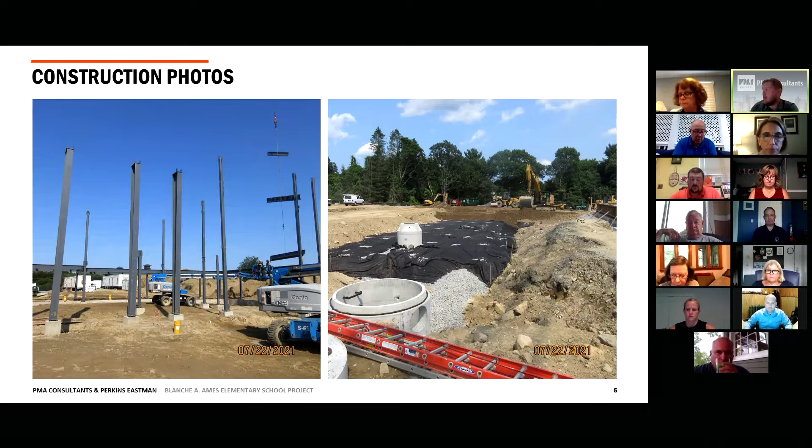In July, since our last meeting, we've had continuation of structural steel. This is a picture of a building - I believe we are standing in the gymnasium, looking back at the trailers on the left. On the right, you see what was the excavation of the old leaching chambers, which is becoming underground infiltration system 3. This is where all of the water from the roof of the building gets transferred and dispersed into one of these three units. The other two have already been completed.

On the left, you'll see excavation and stone backfill for the retaining wall along the eastern side of the site, against the old paper road. On the right, you'll see what was the beginning of the structures installation at the old parking lot - part of phase 1A that we'll talk about today for the parking lot that's going in. So those drainage structures and water distribution systems were being installed.

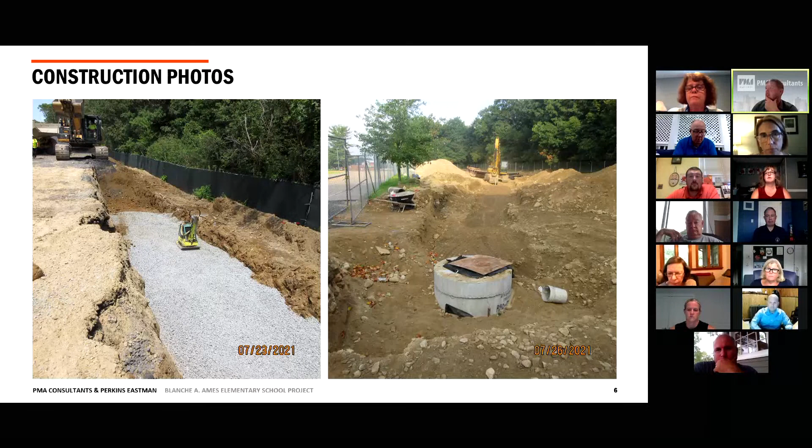On the left, you'll see a photo of the first slab on deck pour, which was on 7/29, for E building. It went great - FFFL, which is floor flatness floor level, was taken that day and it passed, no issues with that first pour. On the right, you'll see continued installation of building foundation and building walls. This is a picture of the rebar getting tied, getting ready for concrete to be installed at the other end.

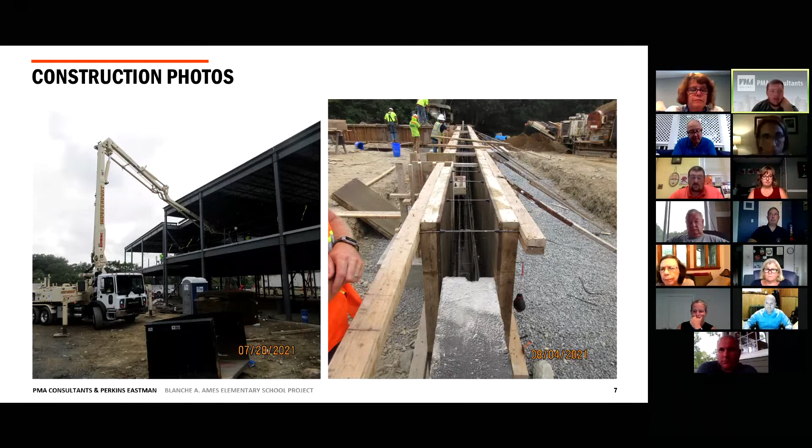On the left, you'll see a photo of the new location for the transformer, which will take the service from the street and then into the building. Additionally, it will also house the generator for the school. On the right, you'll see a picture of the mock-up foundation and mock-up wall, which have progressed today - they have the actual building mock-up framing on them.

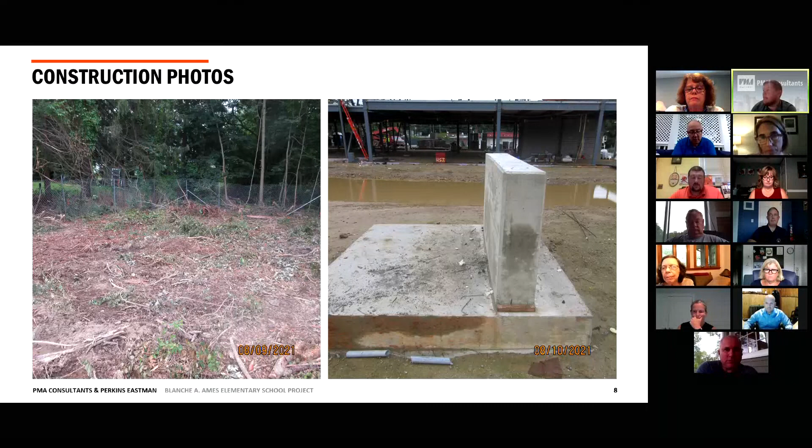We've also continued progress on the underground sanitary lines throughout the building. This is a picture of B building excavation sanitary. The pipe has been installed, it hasn't been backfilled yet, but it runs throughout the building.

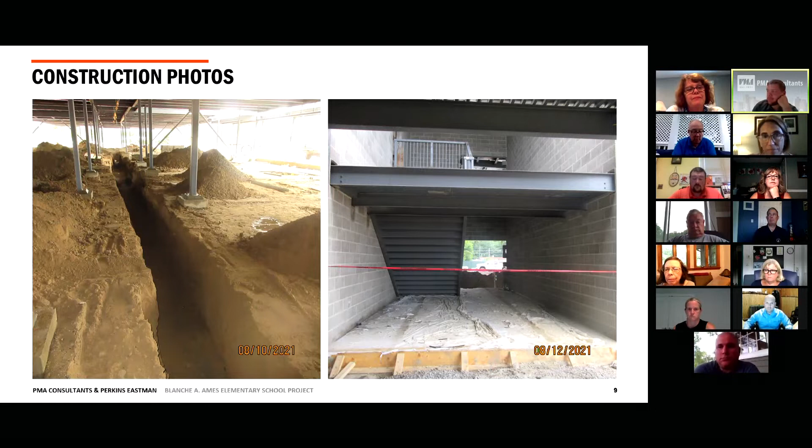On the picture on the right, you'll see stair 4. The concrete has not been poured yet on any of these stairs, so they're not in use at this time, but we do expect those to be poured very shortly. So we likely won't need temporary stairs, we'll be able to use the actual stairs instead of the ladders.

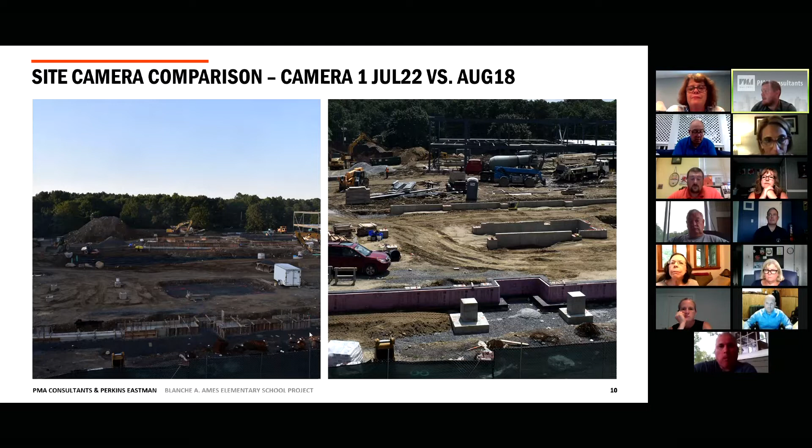Looking at the progress on camera 1, on the left you can see we had no steel, very little foundations, and foundations were ongoing in building D. On the right, you'll see the steel up and foundations nearly complete in building C.

On the left, you'll see building B and some of building A going up. On the right, you will see building B and most of building D erected, and the slabs are getting prepped with the metal deck.

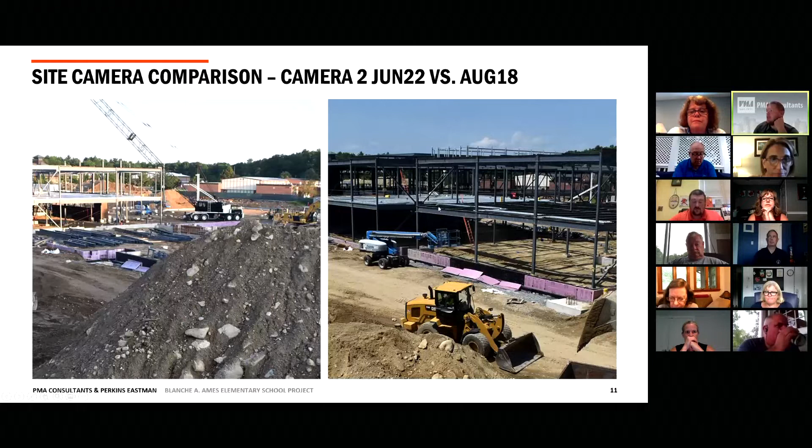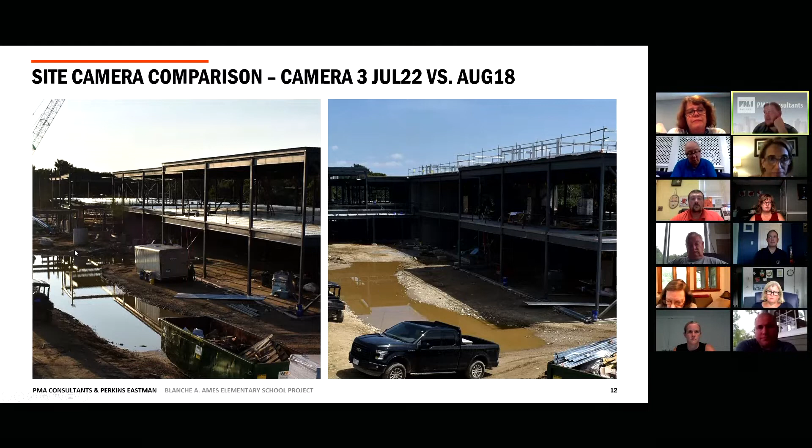I believe that was all of the construction progress photos. So if anyone has any questions, I can't see everyone, but feel free to yell.

So the next item we have is the topping off ceremony. Just a quick background on the celebration, or beam topping off ceremony, what it is and why we do it. It's a pretty big piece of the construction. It's the last beam that's hoisted into place from the crane.

And it's typically, you can see here, I believe it's a Nordic tradition to put the tree symbolizing the building coming out of the earth. And we typically have the flag on the beam that gets lifted up as well.

Right now the plan is August 26th at 1 p.m. It'll be the same for anyone who's going to be visiting the site. Same location as the groundbreaking, that back area right outside the fence. So we won't need hard hats.

At this time, large vinyl stickers were brought over to central office and are in the process of being signed. I'm not sure if someone from central office can advise where they are for signing, but they are available. What we'll do is bring them over on that day and place them right on the beam prior to it being hoisted up.

MSBA will be there, district will be there, PMA, Perkins Eastman, and Brait Builders will be there, and our steel workers, Stellar Steel, and directors will be there as well. So happy to take any questions on the topping off ceremony.

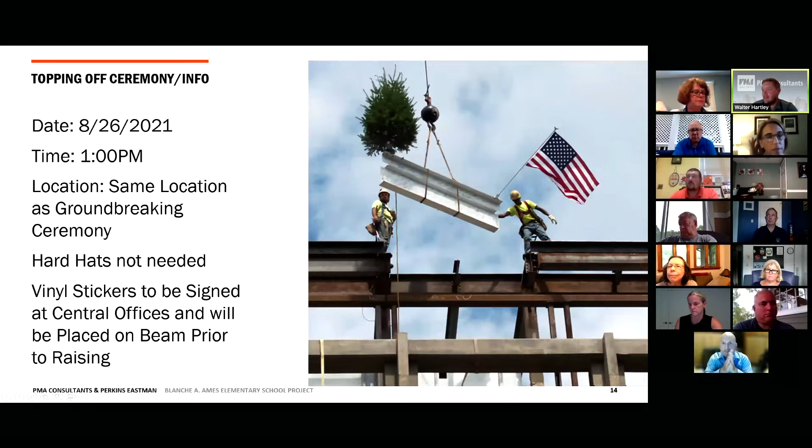Next item, Parkview School reopening. Just to remind everyone of the phase 1A work that's been ongoing and scheduled to be complete - this is the parking lot area you can see highlighted, and the paper road on the right-hand side.

The work in the parking area underground is complete. They are currently placing soil and dense grade in preparation to have the grading machine, the grader, on site Saturday. Brait Builders will be prepping that parking lot area, then the top part of the screen, the curved area, on Saturday.

They are planning to pave on Monday, the 23rd. That is pending weather. If we get some bad rain, bad storms, and it does get pushed off, the pavement day could get pushed a day to the 24th for that top area.

On the right-hand side, you'll see what we call the utility corridor. There's gas, water, underground electric, tel data cable, all coming in from the street and then from two poles that are going to be relocated.

For the two poles being relocated, we are awaiting documentation from the utility companies that's going to go over to the Board of Selectmen. We were trying to get on their agenda for Tuesday, but unfortunately the documentation isn't accurate, isn't up to date, and is being revised. They're working through that right now.

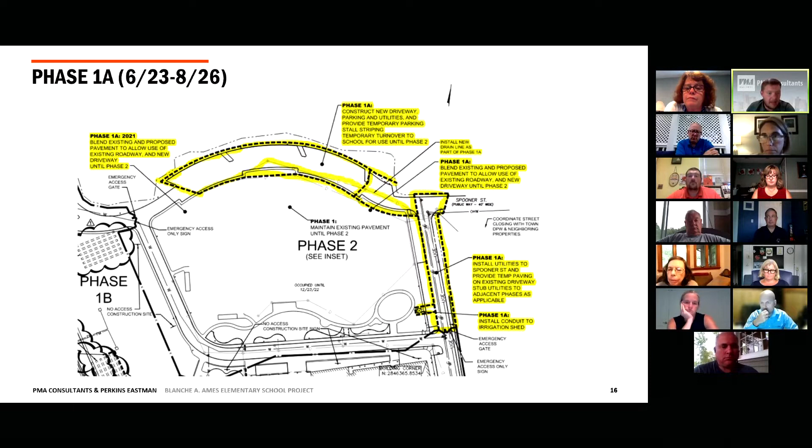So we're working with everyone to try to coordinate that. I think I have another picture to show, and I'm more than happy to take any questions or talk about anything in regards to this.

If you can see the curved area at the top of the street, that's the new parking area being prepped right now. Spooner Street runs straight through without the curve, and this parking area connects back on both the east and west sides. So I'll take any questions or discussion on all of this.

I think you're good, Walter. Obviously it seems that you are doing what you need to do in terms of coordinating with Sam and the school, and I think that's very critical. If there's any point where you also need to reach back out to abutters, I'm confident you'll do that as necessary as well.

Absolutely. Those are always my concerns right now as this work is going on — making sure we're connected with the abutters to the extent that we can and need to be, and also minimizing the impacts to Sam as he tries to run a school this year.

Absolutely, we're going to be in contact. We've talked to Sam a bit, but I think we'll be in contact with him almost on a daily basis, if not every four-hour basis during the school year. It's going to be busy and tight, and I'm sure we'll get some of his deliveries and he'll get some of ours, and we'll coordinate them and get that all straightened out.

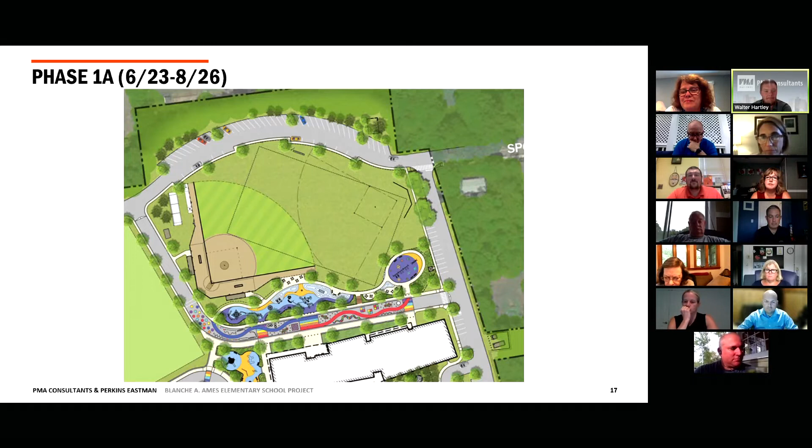All right, quick cash flow and schedule update. Billed to date is 16.3 million. That is through the month of July.

We are expecting our next requisition from Brait Builders shortly, in the next week or so.

MSBA reimbursement to date is 3.9 million, and pending MSBA audit is 9.2 million. We're expecting them to review that 9.2 million and provide reimbursement very shortly. That request went in, I believe, about 2 to 3 weeks ago, and they're usually about 3 to 4 weeks behind the request. So we're in good shape there.

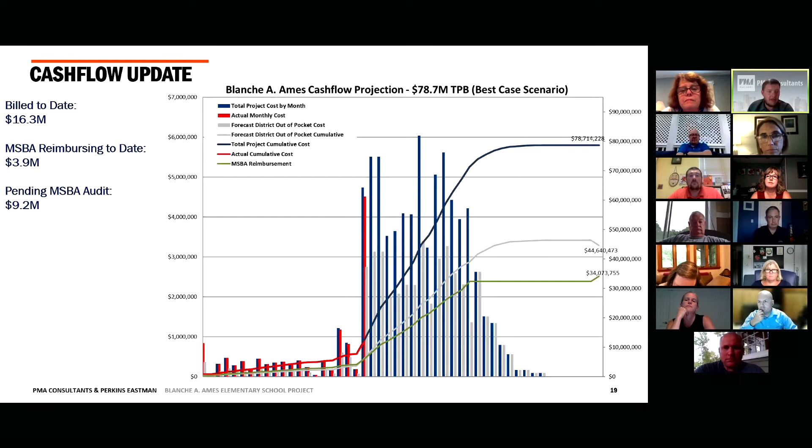Construction look ahead: we'll be completing structural steel in building C and D, completing the phase 1A work, with the caveats we talked about earlier, the 2 stub-outs for tel data and power, and the permanent power. We're going to continue with placements of slab on deck, and probably start slab on grade very shortly once the underground is complete in building E.

We're going to continue with the installation of underground utilities throughout the building. Masonry walls have been going up, and I would expect those could be complete within the next month or two.

Installation of roofing is ongoing. We are in a temporary roof situation as the insulation is not coming until later in the year, but that's not a big deal. It's getting temped in by our roofing subcontractor, and they're doing a great job so far.

We're going to continue with site drainage and getting into retaining walls around the site. We're going to continue with layout of interior and exterior walls, and very likely begin framing of the interior and exterior walls very shortly.

I think we're expecting a delivery next week by our drywall guy. That would be metal studs, not drywall.

MEP coordination is probably going to wrap up in the next month or two. That's really just coordination between all the trades: fire protection, electrical, HVAC, plumbing, everything in the ceiling and underground, from the ceiling all the way down to the underground.

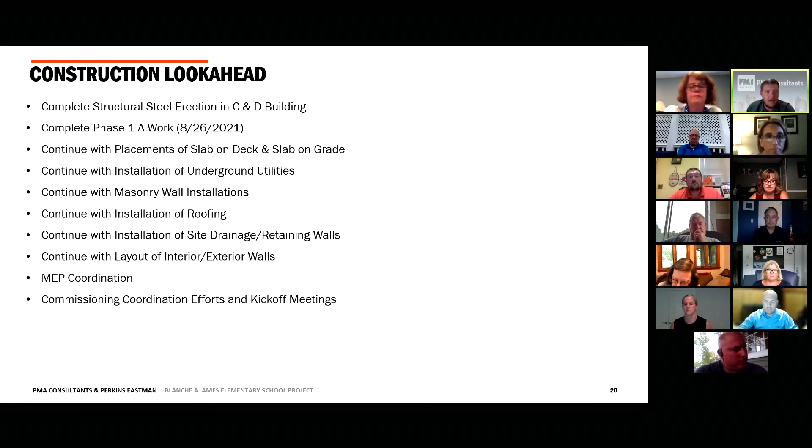We do have one vote, and I'm going to let Dan or Dawn talk about this one. It's a discretionary change that may not be considered discretionary. We're right on the border of needing to do it, and it's changing a custodial storage room to a bathroom. I'll let Dan talk about it.

If anyone can't see this, I can zoom in a bit. Oh, you have drawings, good job. I do, I have the drawing up for you. No, we had everyone's drawings too, and I wanted drawings, but I might want Dawn's drawings because they show the whole building. And of course, timing is everything, because my kids just ran out here with 2 iPads. No, we can't do iPads because of this internet. No, goodbye, I'm going to mine. Minecraft. Okay, as someone with kids, sorry everybody.

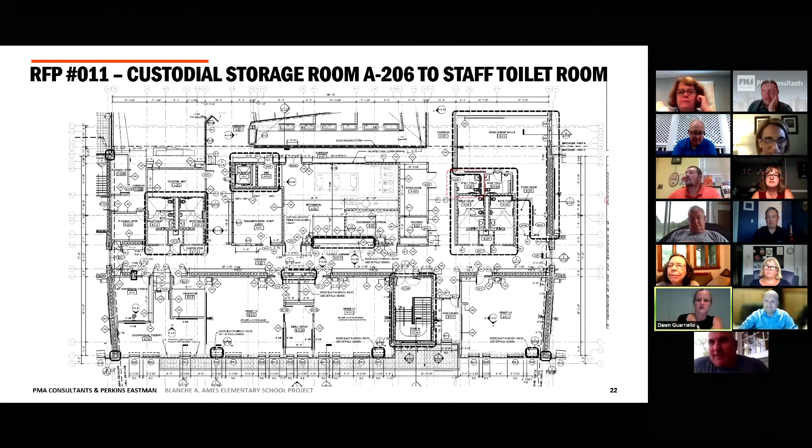Oh nice, Dan, way better. Yeah, it's all right. Better, thanks. You want me to go to the second floor though, right? Yeah, let's go to the second floor.

Okay, so here's the issue. We have a lot of bathrooms in this building, but a lot of them are dedicated to pre-K and students. We don't have a lot of bathrooms dedicated to staff. And there's a distance requirement in the plumbing code about how far someone employed in a workplace can go to get to a bathroom.

The closest bathroom to the D wing, which is this lower wing, you have to go from the furthest door, all the way over by that last classroom, all the way over to these bathrooms by the elevator, all the way down that corridor, all the way over there. So that's just about it.

That's the closest on that floor. On the lower level, we have other bathrooms in the B wing, which is below. If you want to go back to the first floor, yeah, we have staff bathrooms here and on the other side. So we have staff bathrooms in the B wing on both sides, but on the second floor we don't have that same condition.

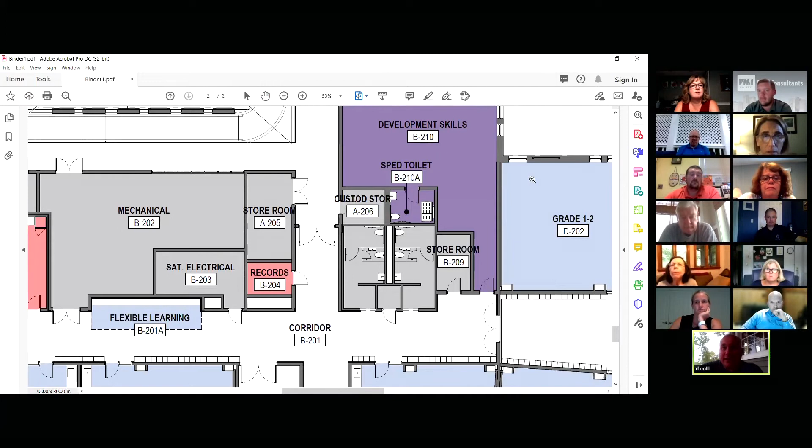We always have children around us or near us, and it definitely makes sense. Is that now going to be a one-stall gender-neutral bathroom for the floor? Yes, for that level, for that portion. There are other bathrooms on that floor, but they're just not as close.

I got it. So it just seems to us like that lower level of the building where D and E and B are all connected, there's nothing really down there. You have to go all the way up into A, and we felt like you really should have something in the D, B, and E portion of the building. That makes perfect sense, of course it does. And I would strongly advocate for that as well.

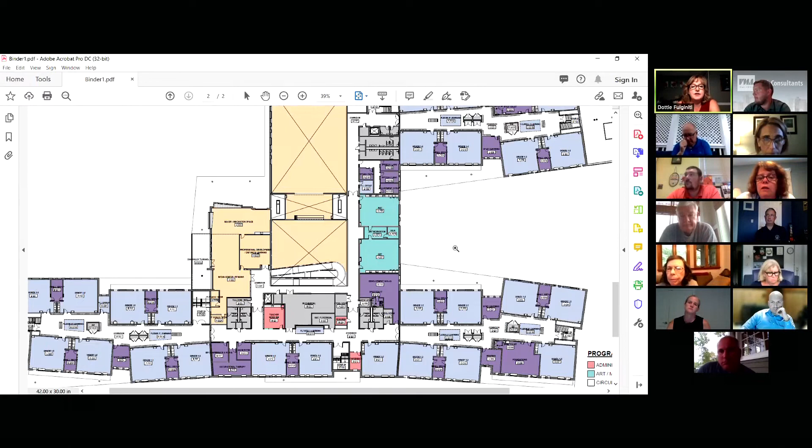Dottie, I think you had a question, go ahead. Yeah, I was just curious - on the first floor, directly underneath that, it looked like there were more bathrooms, and then on the second floor there wasn't. Since there's a requirement, it seems like there would have been an intentional reason why it wasn't on the second floor. Is there something else that we should be thinking about?

No, I think one of the things that changed in the code - and this was a couple of years ago, so it might have just been a holdover we didn't keep in mind - is you used to be able to go up and down staircases as an employee to get to a bathroom. They've changed that; now you have to go up and down an elevator. So when you used to calculate the 300 feet from, say, the D wing, I could go down the staircase to get to that closest bathroom, which was well within 300 feet. But now I have to calculate it all the way over to the closest elevator and back to the bathroom. So that's kind of where the issue is - we didn't really keep that little change in the code in mind, which happened in the last couple of years.

That's the issue - if you could go down a stair, it's not a big deal. But I also think just going down the stair isn't ideal in this case. I think you want to keep it on that floor.

Jane? Go ahead, Caroline.

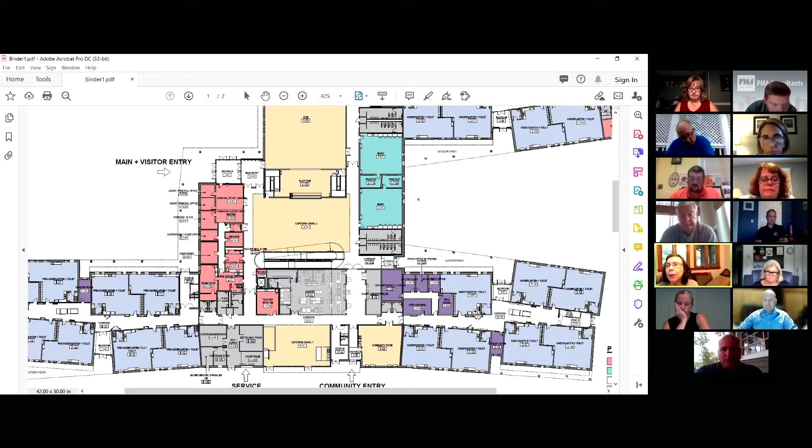I just wanted to mention that right after Richardson Olmsted was built, a couple of teachers actually came to me and said that the one complaint they had was that for their particular classrooms, the bathrooms were too far away. They were kind of upset about that. So I'm really happy now that we're considering this. I think it's really critical for staff. So thank you.

Thank you. Anybody else? Questions, comments, concerns? And if not, I think I will ask for the school planning committee to take a vote to authorize this, but I want to make sure there's no other comments or questions. And so we'll vote. That will give the authority to, go ahead.

Were you going to say something, Walter? Sorry, nope. Okay, so if we vote, it will give the authority to just move forward without having to come to us. They can negotiate a price. It will streamline the process, I'm assuming. Okay, absolutely, yep. So any other questions or comments?

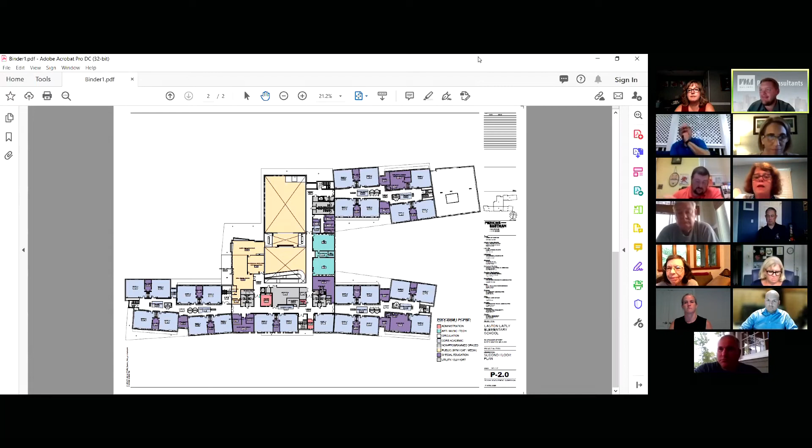Great, so I'm gonna ask for a motion to approve the change, RFP number 14, which has to do with the substitution of a custodial closet with a staff bathroom on the second floor of the building. Is that specific enough for you, Walter? RFP 11, but yep, that's perfect. Oh, I'm sorry, I thought it said - if I got that wrong on the agenda, I'm sorry, because it's - yeah, RFP 11, it says 14. So RFP 11, which would authorize the change from the custodial closet to a bathroom on the second floor.

Cabral: Okay, so moved. Could I have a second? Second, Cedarbaum, second. Great, thank you. Cabral, yes. Wiseman, yes. O'Neill, yes. Fulginiti, yes. Cedarbaum, yes. Weintraub, yes. Carlson, yes. Vamosi, mostly yes. And Martin, I'm also a yes. So that motion carries.

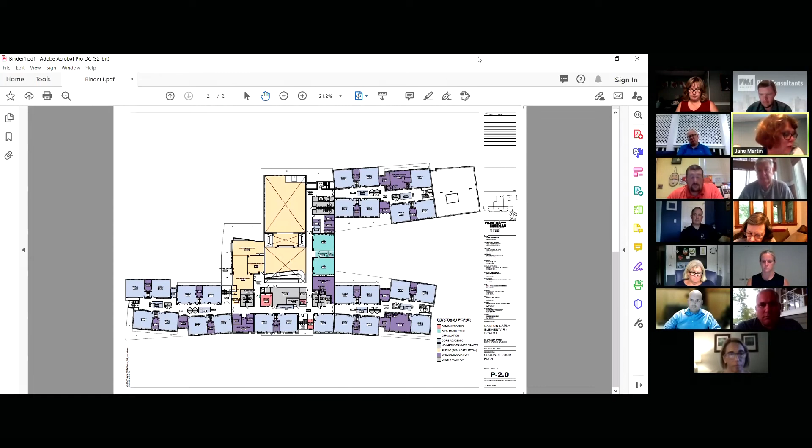Keep going, Walter. No problem. Don, I'll grab the screen share. Thank you. All right. And good news is not much more.